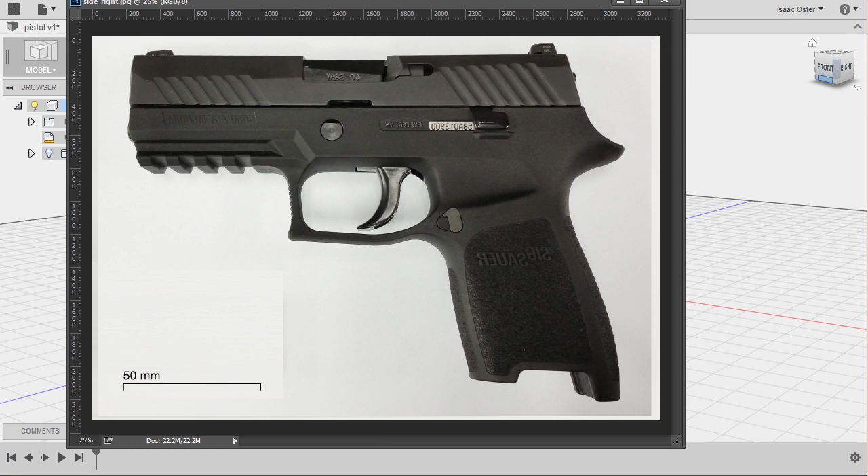And what you can tell, this is actually the right side, but I flipped it. And the reason that I flipped it is so that it lines up perfectly with the left side, so that I can use the same canvas in Fusion 360, and if I'm working on the right side, I can load this image, and if I'm working on the left side, I can use this image, and I don't have to worry about setting up the second canvas.

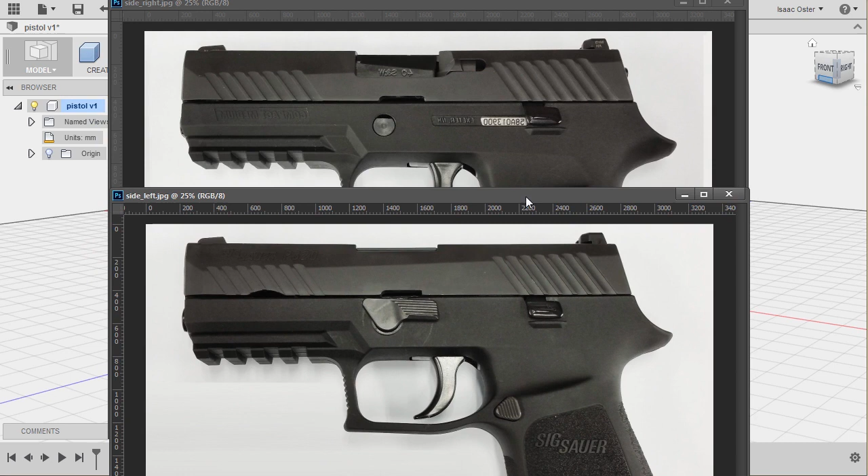So let's go ahead and begin setting up our canvases here. The first thing I'm going to do is actually create a new component. Now, I could work the entire project here in the root node, but I like using components because it will help organize our construction history and just keep things a little bit more efficient and easy to look through and find stuff. So I'm going to right click where it says Pistol V1 here and select New Component. And we can just rename this one Slide.

Now, when you're doing this, it doesn't really matter for Fusion, but down the road, it might cause more of an issue. Make sure that you don't put any spaces in your names, just as a general rule. So I'm going to click this little circle here next to Activate Component, and that'll basically turn on the component. And we will go to Insert, Attached Canvas, and then I'm going to load this first reference image here.

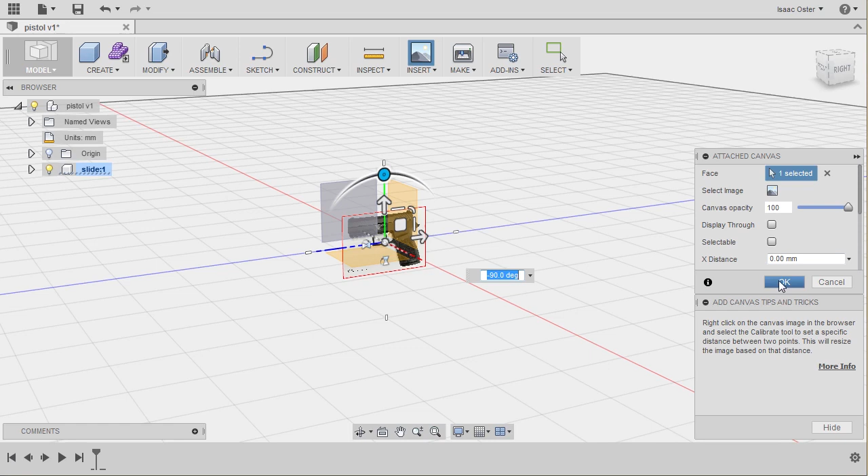So this is where it says right here. That's how we know this is our side plane. So I'm going to click that as our face. Here in Select Image, I'm going to grab side left and rotate it 90 degrees, or negative 90, I suppose, so that it is oriented correctly there. I'm going to hit OK. And now I'm going to open up my Slide 1 component, go to Canvases, and then right-click and select Calibrate.

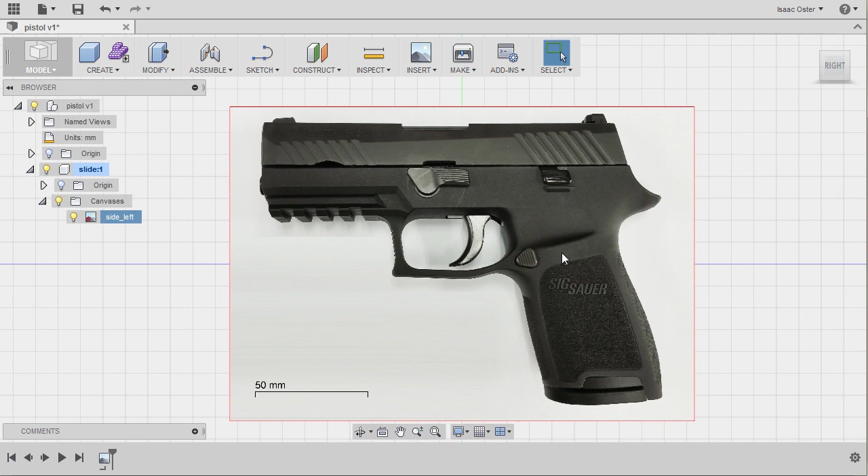So what this will allow me to do is click this little point here and this point over here, type in 50 millimeters, and it'll scale the image up to the proper size. So if you wanted to 3D print an object, this is an excellent way to make sure that from the beginning of the project, you're working in an accurate scale.

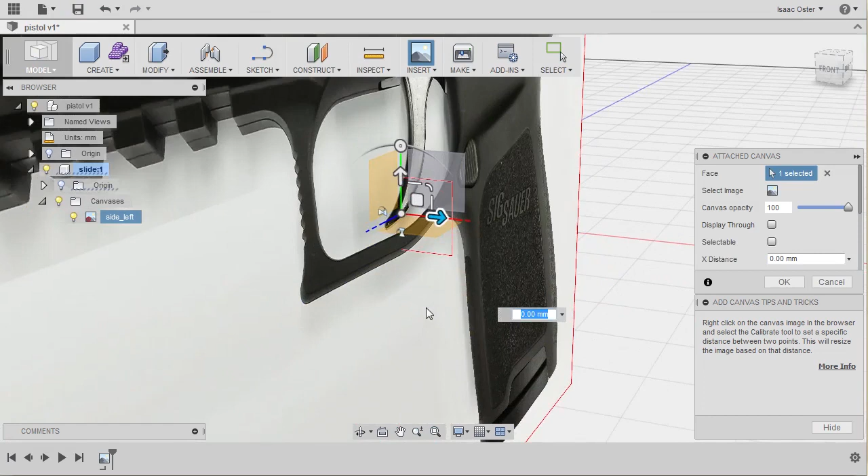Let's go ahead and add another canvas here. So I'll go to Insert, Attach Canvas. And for this, we'll use the front plane. Go to Select Image, and I will grab Front, hit OK. And I'm going to hide my original side left here so I can see, okay, so the orientation there is correct. So I can hit OK. And now I'm going to hit Calibrate.

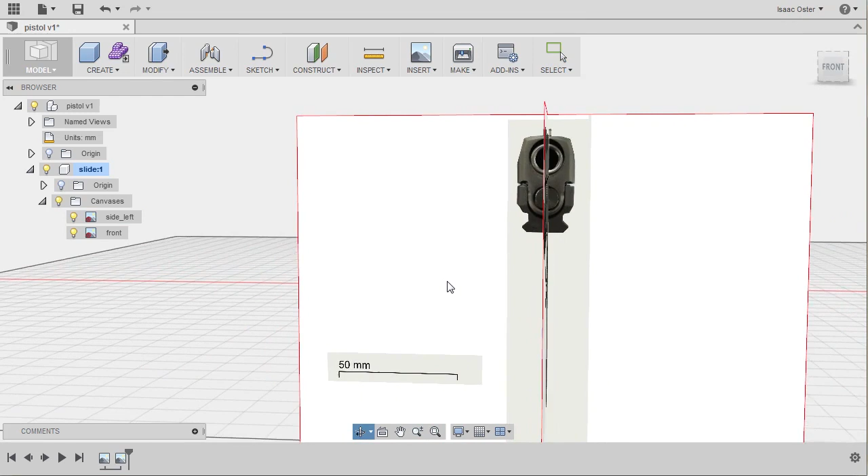And zoom in a little bit. And click our 2 points. And type 50 millimeters. So if everything has gone according to plan, everything should line up perfectly. So we don't have to worry about moving things around too much.

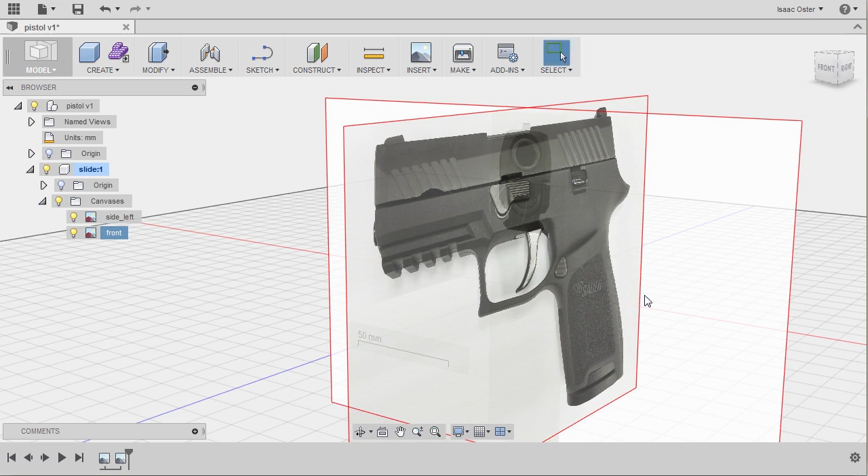So to make it so that I can see through these, I'm going to right click, go to Edit Canvas, turn on Display Through, and set the opacity for both of them to 75. So again, that's Edit Canvas, turn Display Through on, and set the opacity to 75. So we're getting a little Z fighting there, but that's not going to be too much of an issue. We'll probably only be using one plane at a time as we're actually working.

So what I'm going to do is set up the other reference images and save the file. And in the next lesson, we'll talk about how to actually load the Fusion 360 files, and we'll have all of our reference set up and ready to go.